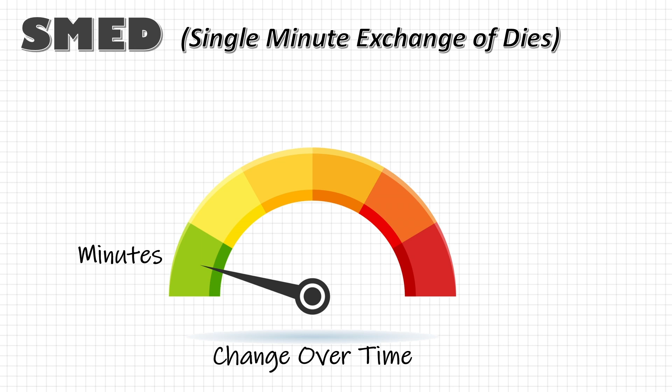Before we go any further, let's clear up a common misconception. The term single minute does not mean a changeover should literally take 1 minute. Some people think it means a single digit minute, anything less than 10 minutes. But that's not the essence of SMED.

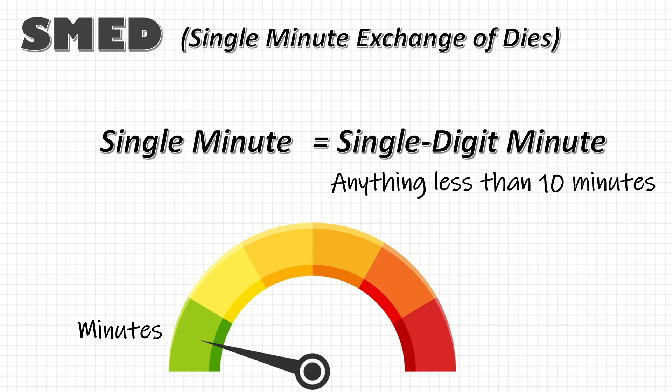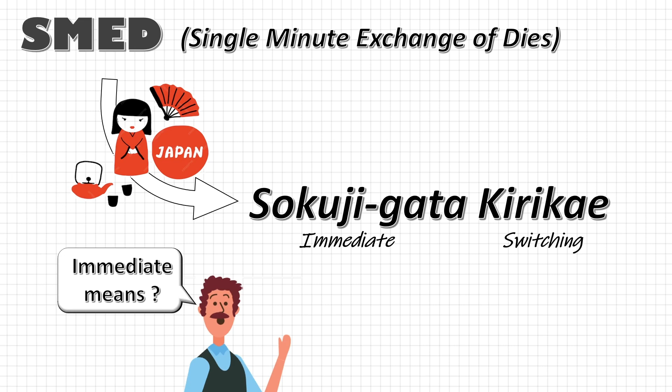This concept originated in Japan, and the Japanese term Sokuji gata kirikae roughly translates to immediate switching. The Japanese language does not put any limit to what immediate means. So perhaps when we translated Sokuji gata into English, we roughly translated immediate as within a minute.

SMED was introduced by Dr. Shigeo Shingo as a part of the Toyota production system. The primary goal of SMED is to reduce changeover time.

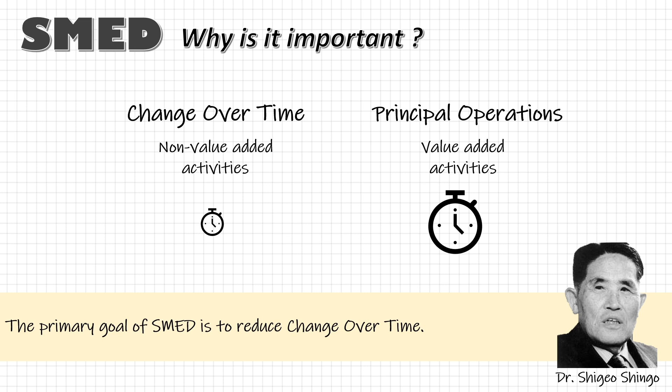So now you may ask why reducing changeover time is important. Reason number 1: by cutting down changeover time, which is a non-value added activity, we can allocate more time to the principal operations where all the value added activities happen. If you want to learn more about value-added and non-value-added activities, check out the lesson linked in the description below.

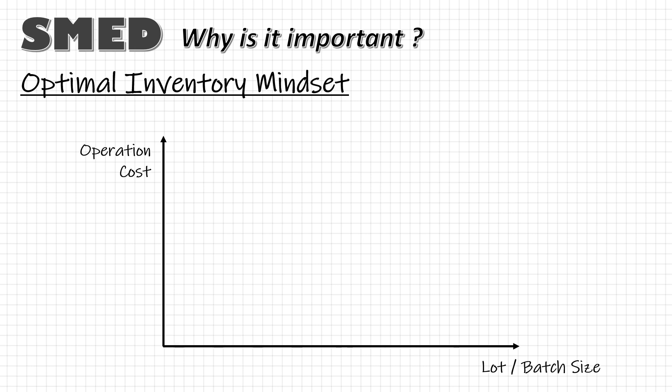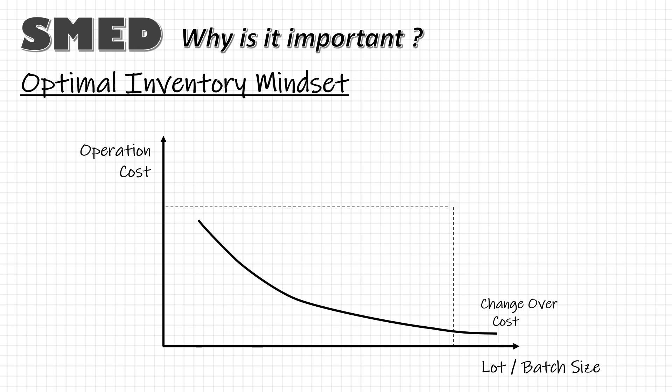Reason number 2, it helps avoid the optimal inventory level mindset. Imagine this graph, where we have lot size or batch size on the x-axis and operation cost on the y-axis. If an organization runs small batch sizes, it needs frequent changeovers, leading to high operational cost. Conversely, bigger batch sizes mean fewer changeovers and lower operational cost, but bigger lots also mean higher inventory level and higher inventory carrying cost.

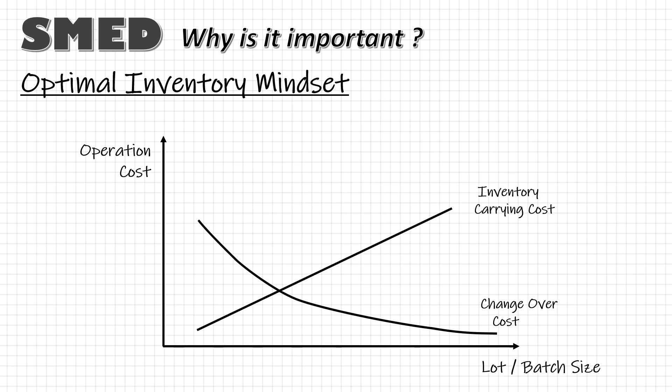Again, reducing lot size lowers both the inventory size and the carrying cost. So it becomes a balancing act, and our job is to identify that sweet spot where both inventory carrying cost and operational cost are minimum. SMED challenged this mindset and proposed that if we work on reducing changeover time, we can produce smaller lots without losing much on operational cost. This means both lot size and operational cost can be reduced together.

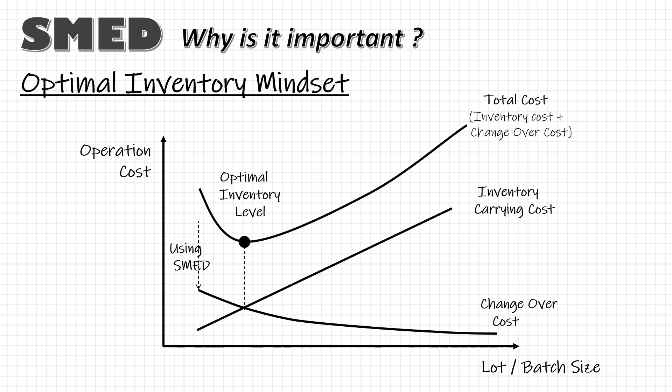A win-win situation. Now you may also want to know how much setup time can be reduced with SMED.

According to Dr. Shingo, Mitsubishi Heavy Industries cut the changeover time of its 8 arbor boring machine from 24 hours to just 2 minutes and 40 seconds. Toyota Motors reduced the setup time of a bolt forming machine from 8 hours to 58 seconds. On average, setup time reductions are around 80 to 95%.

Before we dive into SMED techniques, let us quickly review 2 types of setup operations. First is external setup. These can be done while the machine is running, like transporting dies to or from storage. And the internal setup - these can be done only when the machine is stopped, like mounting or removing the dies.

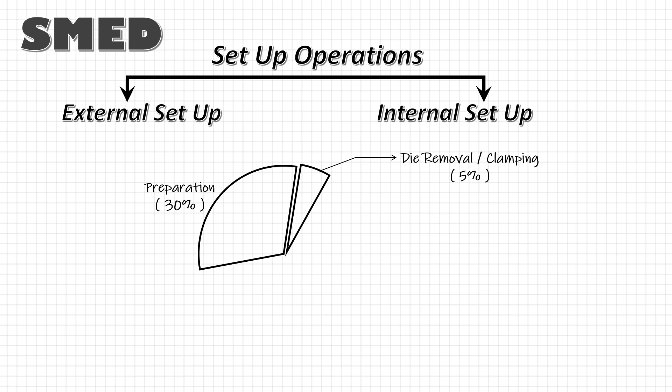Dr. Shingo divided typical setup time into 4 stages. Number 1: preparation of material, dies, jigs and fixtures, which takes about 30% of the total time. Second, removing or clamping of dies, around 5% of the time. Third, centering or determining the dimensions of the tooling, roughly 15%. And finally, trials and adjustment, the remaining 50%.

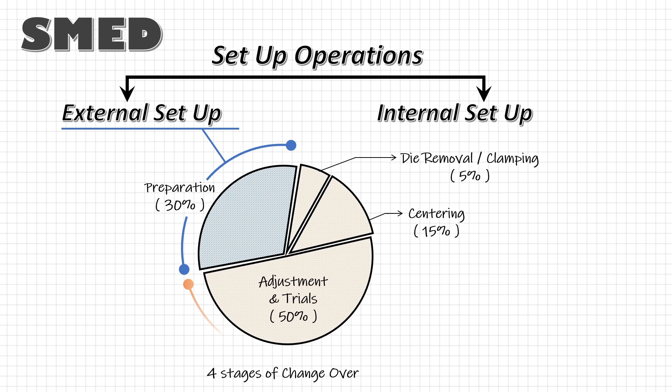Here, the first stage relates to external setup, while the remaining 3 stages are internal setup. Dr. Shingo suggested 8 techniques to reduce changeover time, and these techniques should be used in exactly this order. Let's dive deeper into these techniques, starting with technique number 1.

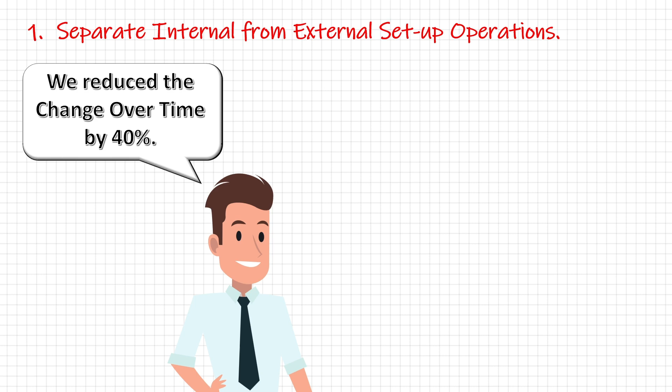Separate internal from external setup operations. Imagine if someone told you that they could reduce the changeover time by 30 to 40% without any investment or extra manpower. You would probably be skeptical, right?

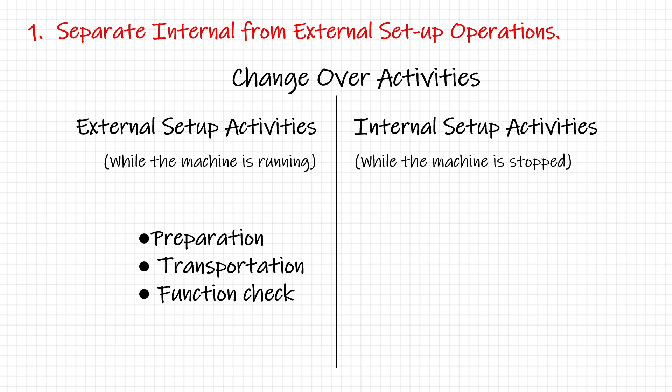But this is exactly what can be achieved by clearly identifying external activities, those that can be done while the machine is running, and internal activities, those that must be done while the machine is stopped. Common examples of external setup activities include preparing and transporting dies, jigs, fixtures, tools, and material to and from the machine. Internal setup, on the other hand, should be limited to removing old dies and placing new ones.

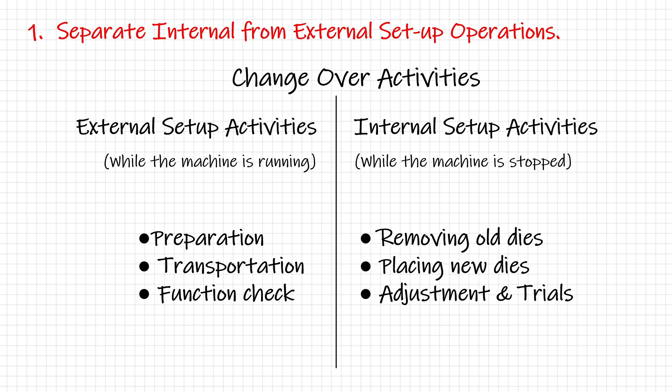You can easily separate external and internal setup activities using a changeover sheet. So what you have to do is observe the changeover process as it is, list all the activities in sequential order, note the time taken for each, and then mark them as internal if they must be done while the machine is stopped, or external if they can be done with the machine running.

To separate internal and external setup activities, try to keep all internal setup activities together and move the external setup activities to either side. It is that simple. Now let's go through it one more time.

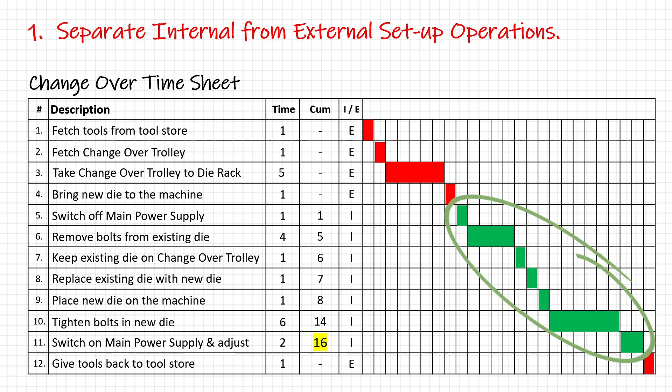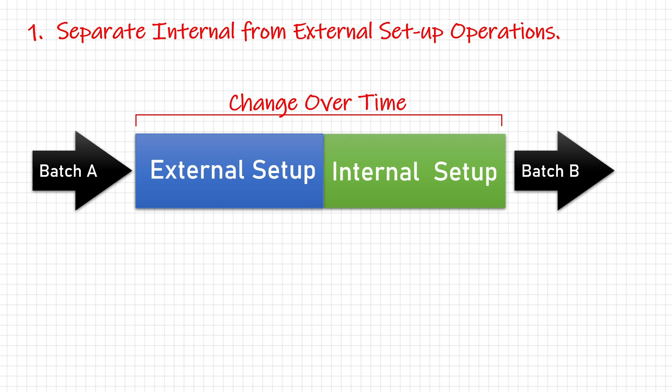There is an existing process with some initial setup time. We divide this initial setup time into external and internal setup time, and then perform the external setup activities while the machine is still running.

The next step is to convert the internal setup into external setup. This is the most powerful principle in the SMED system. It involves re-examining operations to see if any steps have been mistakenly assumed to be internal setup and finding ways to convert the internal setup to external setup.

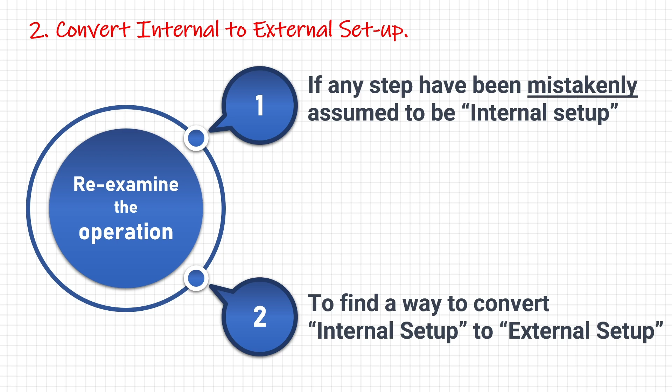Now I know what some of you might be thinking: how could an internal setup activity be changed to an external setup activity? Let me share an example. One activity that was considered an internal setup for a long time but is now accepted as an external setup activity is the preheating of injection molding dies.

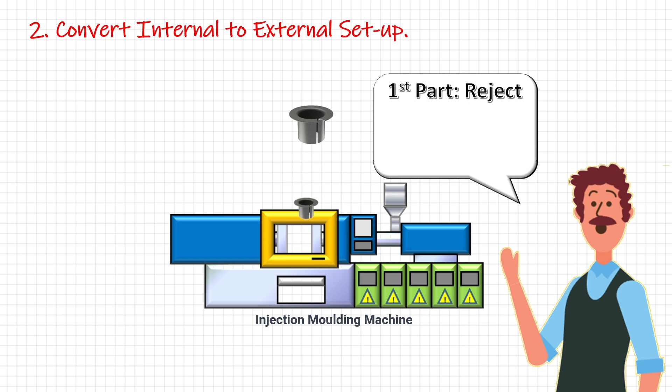When cold dies are attached to the molding machine or die casting machine, the initial production parts are usually defective until the die reaches a certain temperature. But these dies can be preheated to reduce the number of trial shots. The result is reduced changeover time and reduced rejection loss.

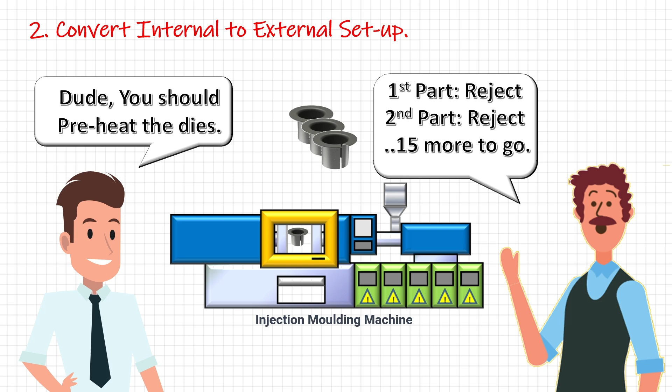By the way, did you know that during pit stops, the new tires of Formula 1 racing cars are also preheated to raise temperature? A warmer tire has a better grip, which allows for faster cornering and acceleration.

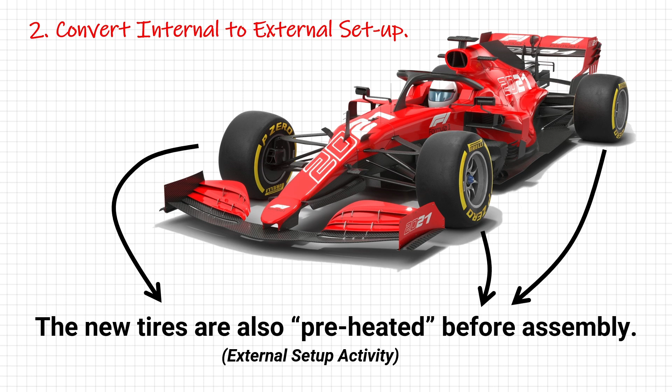Another example to reduce internal setup time involves shut height adjustment. And this brings us to technique number 3: standardize function, not shape.

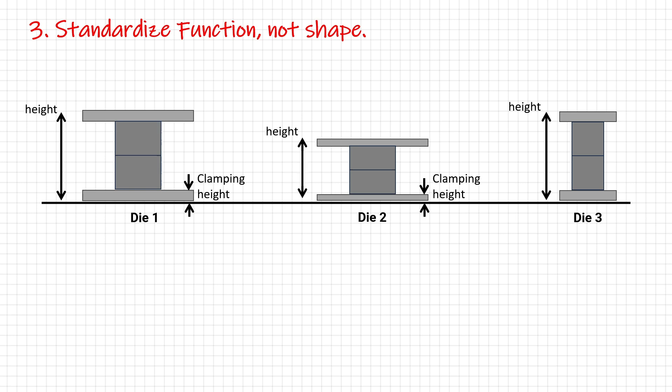Standardizing the shape and size of dies, or in other words, standardizing the shut heights and clamp heights, can reduce the setup time. But shape standardization is wasteful because all the dies would have to be conformed to the largest size used, requiring extra material and weight to be added to the dies. This could lead to unnecessary cost.

When we standardize function, we need uniformity only in the parts necessary for setup operations. With this approach, dies need not be made larger, and the cost is comparatively low.

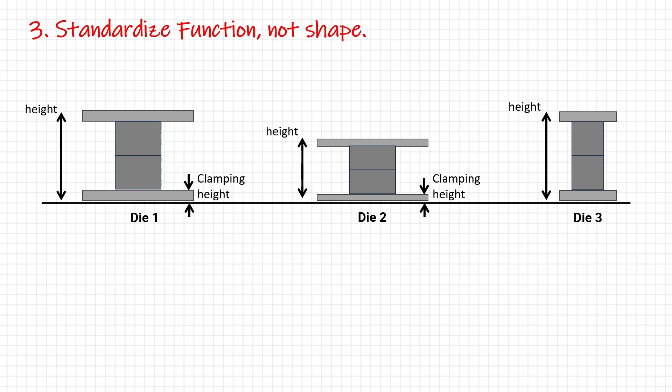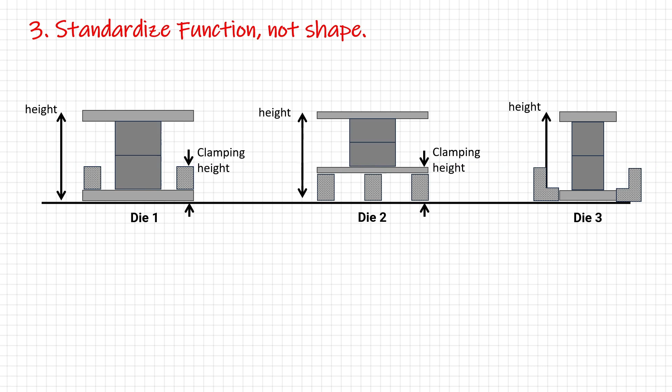For example, to maintain the same shut height for different dies, we can first increase the height of die 2 by using standard shim blocks. Then the clamping heights can be standardized by adding standard shim blocks to die 1. This way, we can standardize the clamping function, not shape, and still achieve the desired result.

The idea is to break down the die into different elements, analyze the function of each element, and decide which elements need to be standardized so that changeover can be done by replacing as few parts as possible.

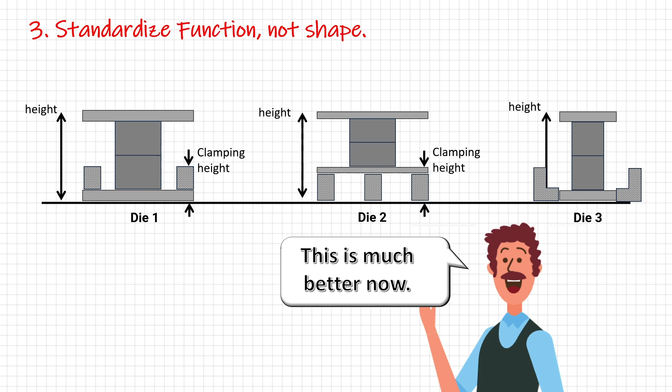The next technique is to use functional clamps or eliminate fasteners altogether. A bolt is the most commonly used clamping device, but it can be very time consuming. For example, a bolt with 10 threads must be turned 9 times before it is actually tightened on the last turn.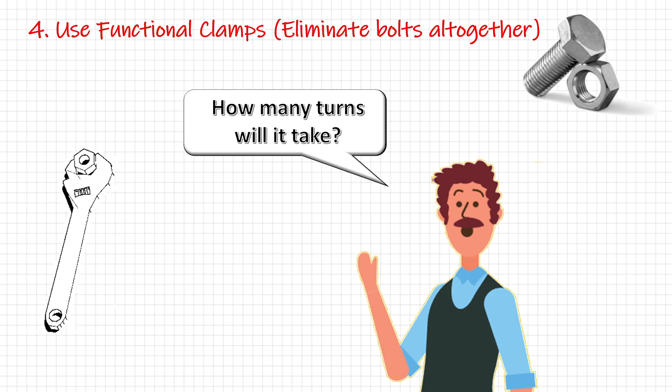It is always the last turn that tightens the bolt, and the first that loosens it. The other 9 are wasted motion. If we could secure a die or jig using only a single turn of the bolt, it would become a functional clamp. Now, how do we do that?

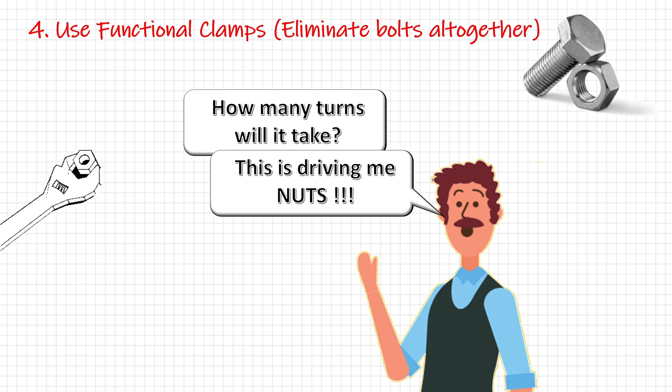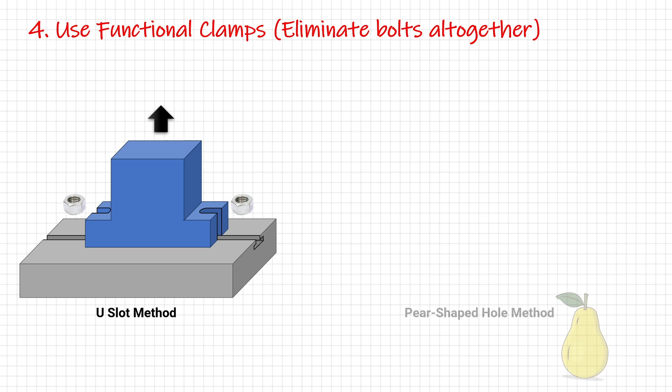There are various methods, such as the U-slot method, where you loosen the bolt by turning one thread and free the die plate by sliding the nuts and bolts. Another similar method is a pear-shaped hole, where the bolts are often fixed and we move the part to disassemble.

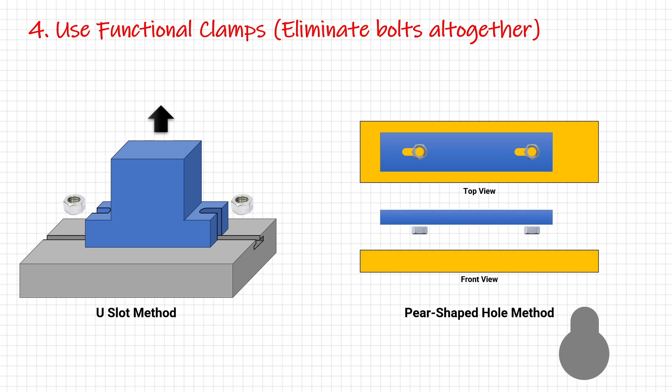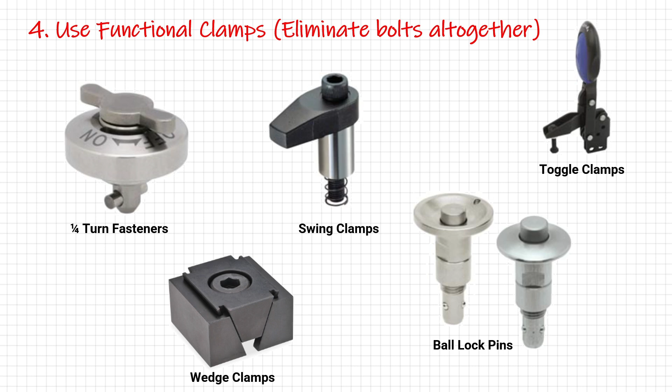Threaded screws or bolts are not the only way to clamp dies. There are methods like using quick release wedges and clamps which can provide one-touch changeover and eliminate fasteners. Yes, these may be costlier than traditional bolts, but they are not costlier than your changeover cost.

The next technique is to use intermediate jigs. This method converts internal setup into an external setup activity. Now, to understand this, let's take the example of changing a cutting tool on a lathe.

Originally, this changeover includes removing the old tool, attaching the new tool to the tool post, and then adjusting the height and angle of the cutting tool. A lot of time is consumed in adjustment.

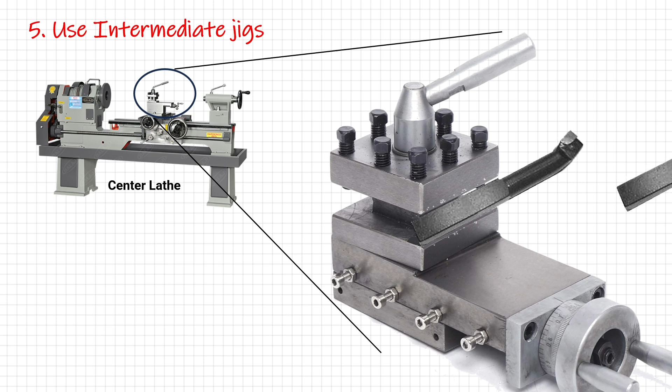By having a duplicate tool post, which will act as an intermediate jig, and using a makeshift arrangement similar to the lathe setup, we can set the height and angle of the new tool as an external setup.

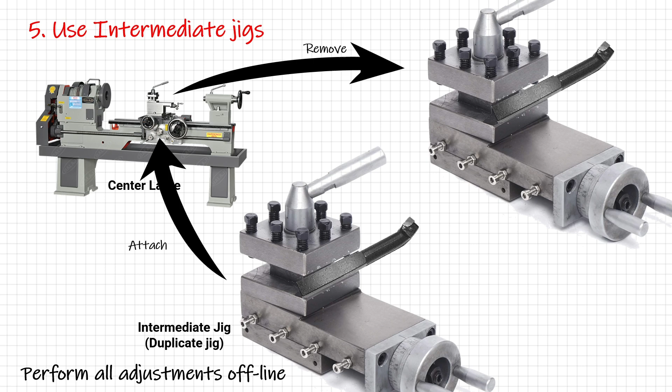And during changeover, all we have to do is replace the complete tool post, and almost no adjustment is required. This method is particularly useful in scenarios where part adjustment time is very high.

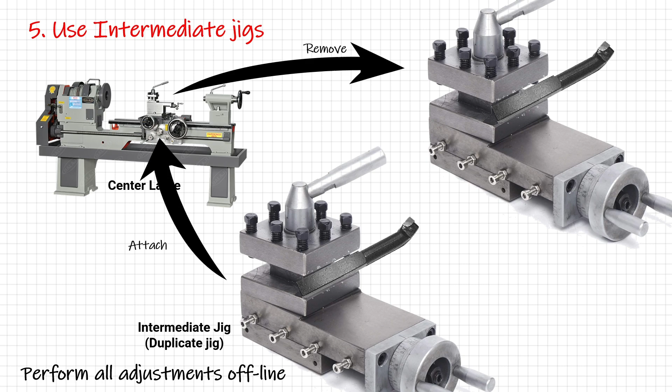While the workpiece attached to the machine is being processed, the next workpiece can be centered or adjusted as an external setup using an intermediate jig.

Our next technique is to use parallel operations. Now imagine setting up a plastic molding machine or a die casting machine.

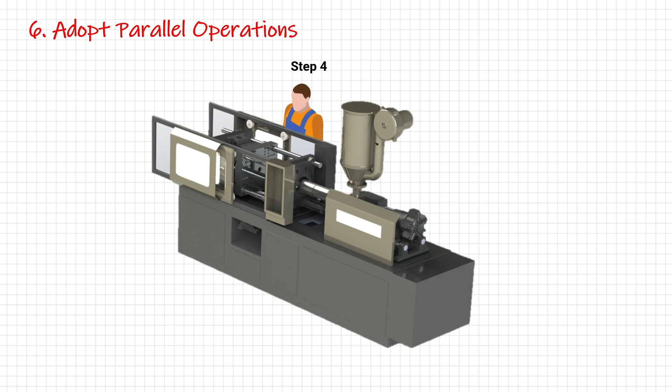Typically this involves changing parts on both sides, the front and the back of the machine. If one operator handles these tasks, it takes a lot of time as they move back and forth. But if two operators work simultaneously, setup time can be cut by more than 50%. This method is often overlooked because managers think they cannot spare another worker. But as compared to the cost of changeover, it is always worth it.

However, safety is crucial here. Each operator must signal the other before proceeding to the next step, ensuring a smooth and safe operation.

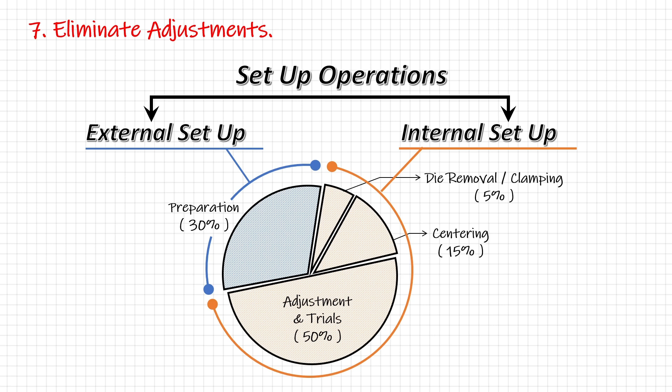Now let us move on to technique number 7: eliminate adjustments. Adjustments and trial runs account for 50 to 70% of the setup time. Eliminating them can lead to significant time savings. The challenge is overcoming the belief that adjustments are unavoidable. People often confuse adjustment with setting fixtures, dies, or tools.

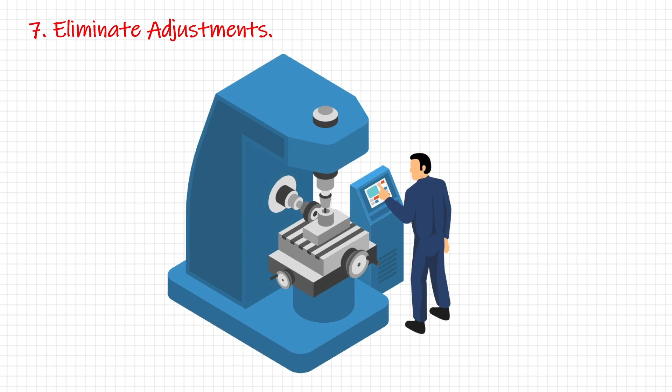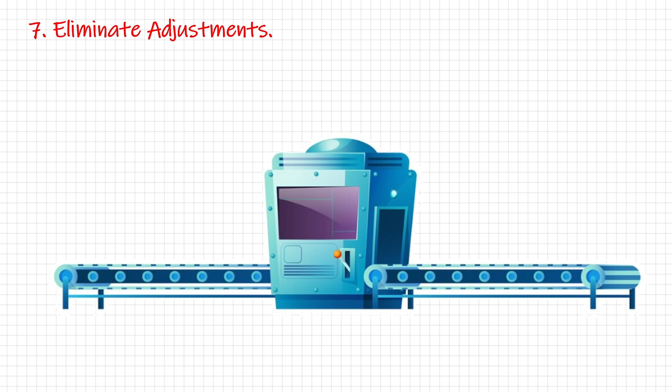Setting involves changing the position of a limit switch, while adjustment involves testing and repositioning it. For example, if a machine uses a limit switch to set the endpoints for machining parts of different lengths, moving the switch to 5 different locations requires adjustment each time. To eliminate this, install 5 limit switches at the desired locations. Now you can simply flip the switch for the part you need.

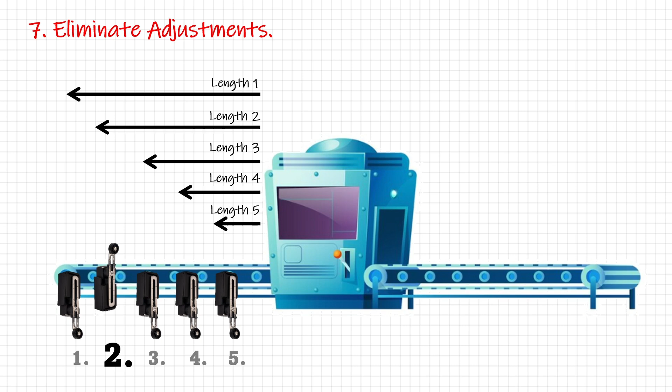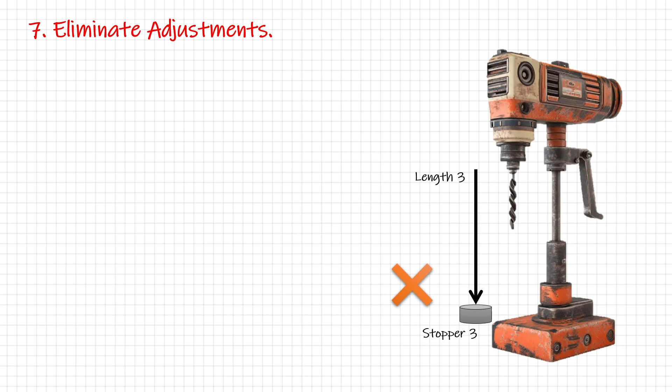For example, if you need part number 2, just flip switch number 2, and so on for parts 4 or 5. Another example is drilling countersinking holes at different depths. Instead of repositioning the stopper, mount stopper plugs of different heights on a rotary plate. Now rotate the plate to set the new depth and secure it with a grub screw or pin. With this one-touch method, you can easily reduce the changeover time to under a minute.

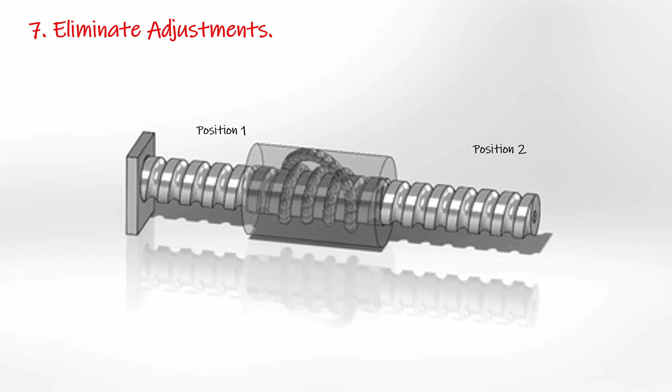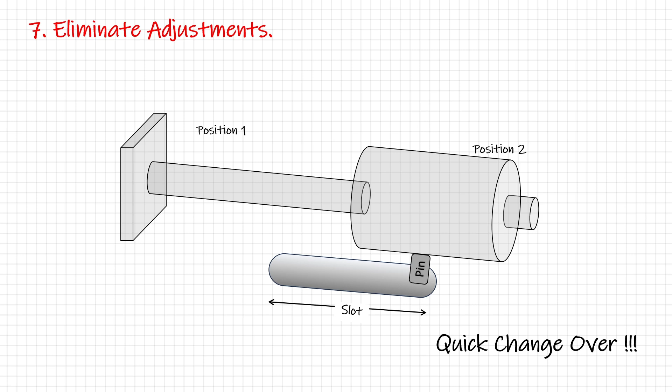Interestingly, our quest for accuracy often creates the need for adjustments. At Togo Manufacturing, a dimension setting stopper was moved using a threaded spindle, allowing fine adjustments. However, if there are only 2 different lengths, why not use a pin with a slot to move directly between positions? Sometimes we also use devices that allow unlimited settings, but for quick changeover, limited or stepped settings are more effective.

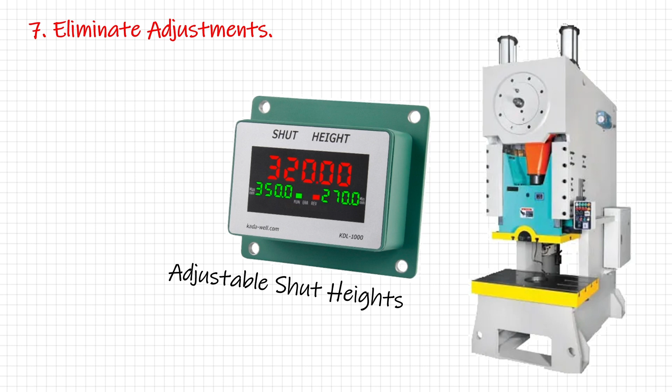For example, presses with adjustable shut heights are common these days. However, once you procure those presses, you should not rely on shut height adjustments for changeover. Even the automatic adjustment takes some time. Instead, standardize your die heights for a quick changeover. I hope this makes sense.

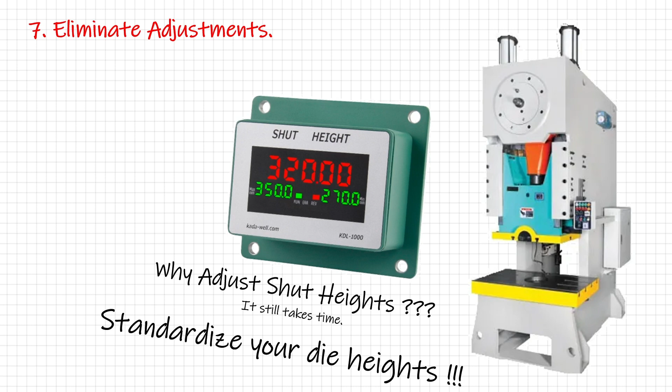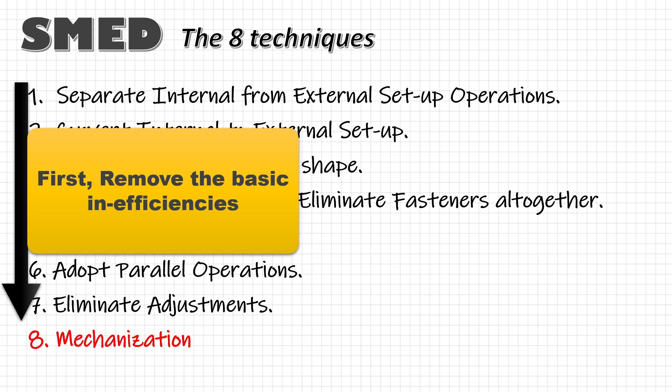Finally, let's talk about technique number 8: mechanization. This involves using machines to automate and speed up the movement of changeover parts for a quick changeover. Mechanization should be the last step after optimizing the changeover process with the previous techniques, because by then you have already removed the basic inefficiencies and potentially reduced a 2-hour changeover into minutes.

Mechanization can reduce the changeover time, but it can be costly. So you should be careful before jumping directly to mechanization without first improving the process, as it can lead to automating non-value-added activities and wasting money.

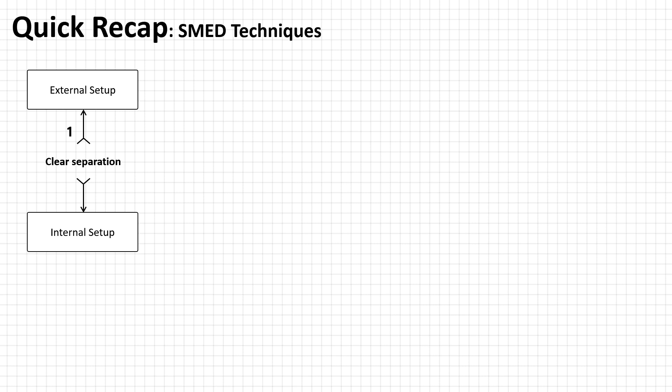Alright, a quick recap of the key techniques we have covered so far. First, we separate internal from external setup operations. Then we convert internal setup to external setup wherever possible. To improve the internal setup, we standardize the function and use functional clamps to eliminate fasteners. We can also use intermediate jigs to convert internal to external setup.

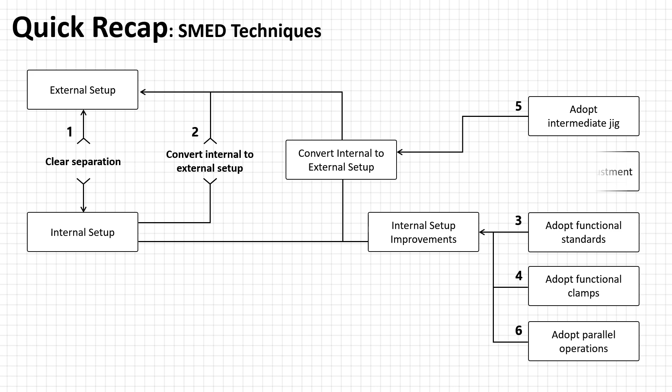Next, we can adopt parallel operations to reduce the internal setup time and eliminate adjustments. And finally, we can use mechanization to automate the changeover process. This sequence ensures a streamlined and efficient changeover process.

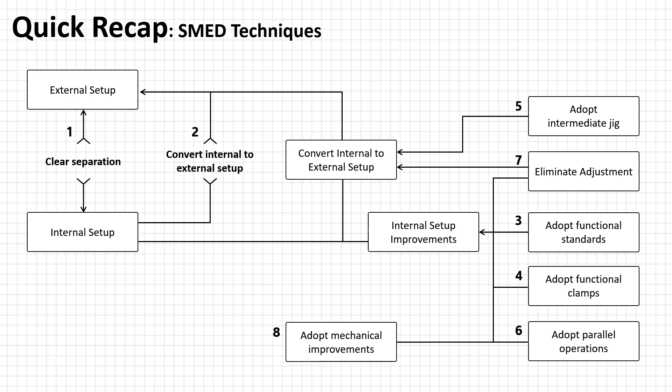One last thing: while implementing SMED, we move through 4 basic stages. Stage 1 is the preliminary stage, where no distinction is made between internal and external setup. This is our starting point.

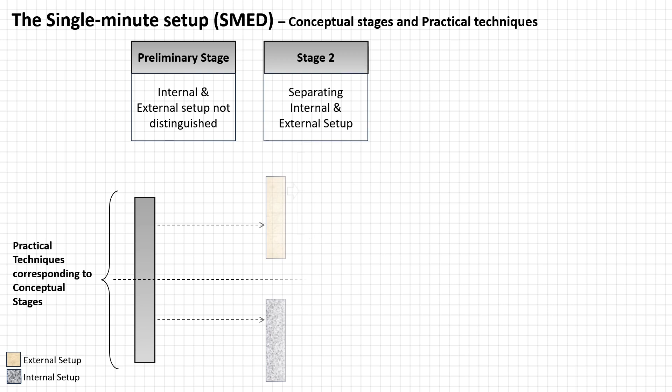Stage 2 is the most crucial stage of the SMED implementation. Here we separate the internal and external setup using checklists and perform function checks. By doing this alone, we can reduce changeover time by almost half.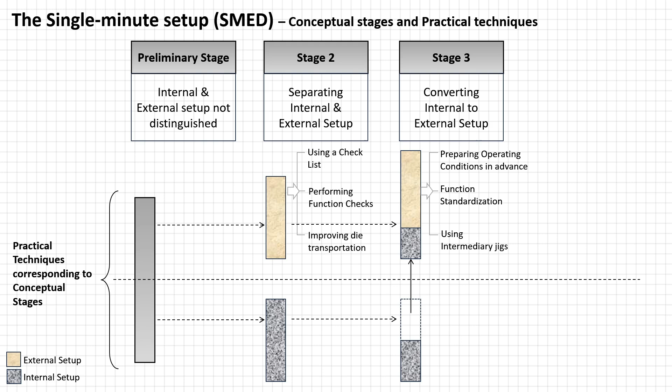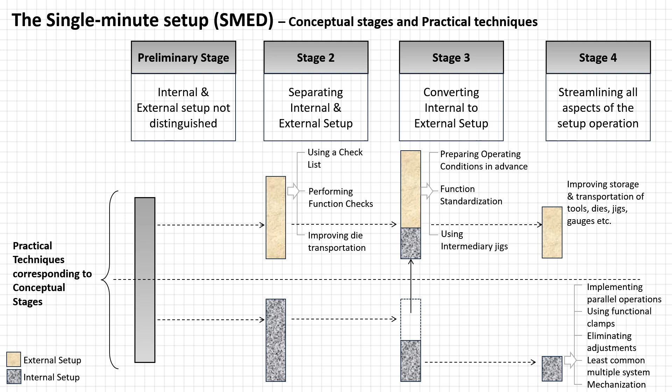In stage 3, we analyze if any internal setup can be moved to external setup using standardization or intermediate jigs. And finally, in stage 4, we continuously seek opportunities to further reduce the internal setup time using functional clamps, eliminating adjustments, adopting parallel operations, and mechanization. This is an ongoing process, and there is always room for improvement.

Remember, the quickest way to change a tool is not to change it at all. Commonization is a powerful method to achieve zero changeover time. Many organizations have already adopted this approach, so no matter how unique your product is, SMED is possible. Start with these basic techniques and watch the SMED revolution unfold in your workplace.